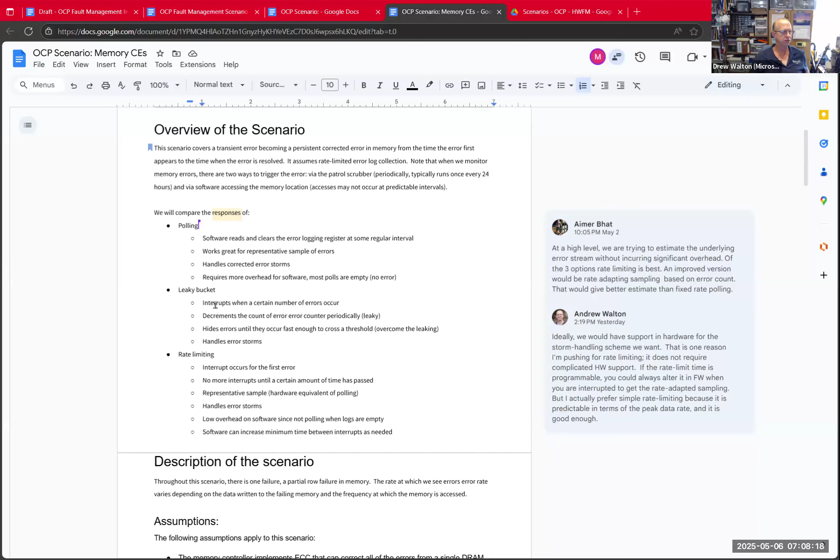Okay. And so then I have an overview of the scenario, and I really am pushing rate limiting, and you'll see why as I walk through it. And I've added things. I've added assumptions. I've added some goals of the analysis. And I'm also talking about some common misperceptions that I've seen. So I've added that since we last talked, like the ability to diagnose memory from a single corrected error.

No one serious imagines that, but some people say, you got the error, just look at the error and tell us what it means. And I'm arguing that we need to look at multiple corrected errors to figure out the scope of the damage or the scope of the fault. And then, we don't want to count errors. We don't need to capture every error.

And so, Roy, if you want to reinforce the need to capture every error, that would be awesome. Oh, yeah. Okay. I will add. Because you've got data, right, that you shared here. So if you're willing to share any part of that, it would be wonderful to have you all chime in as memory vendors.

But then I walk through the scenario, and I say, okay, there's a part of a row that fails, but it's not allocated to software. But it was all initialized to 0, and I just say, look, we don't see anything. There's no error, and then someone writes a 1 to one of the failed partial row that was stuck at 0. And now we get a single bit error, but it's corrected inside the DRAM. We see nothing except for the ECS mode registers.

And then software writes a second bit to the same cache line, and now it's in the same DRAM. And so we start seeing errors. And then we start reading the error infrequently. So we see few errors, then we read it frequently, and we handle the storm. And then we write another cache line in another place. So now we see error rows in multiple places, and now we can decide that it's a post-package repair.

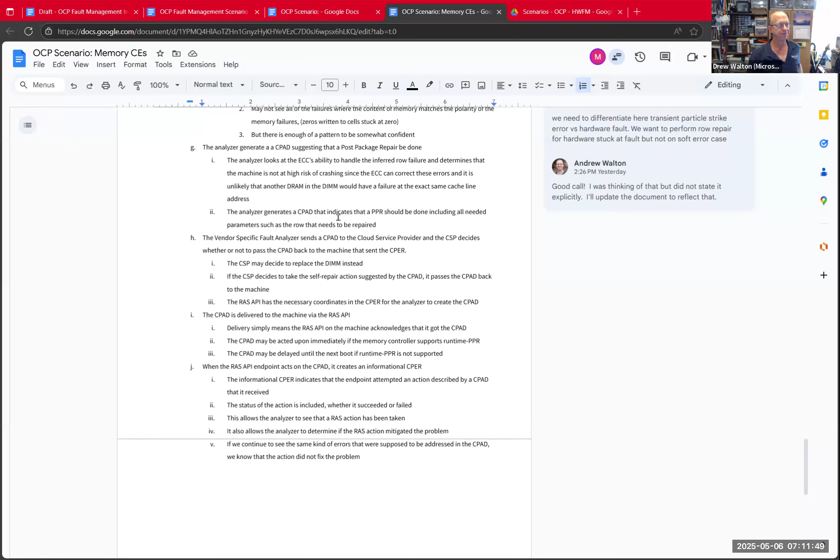I'm trying to do something that I think represents a mutual interest. Right? I'd like to see smarter memory analysis algorithms. And I think you all would too, right? You don't want people replacing memory for stuck-at faults, or assuming that because you had a small burst of radiation strikes, that DIMM is bad. So anyway, please take a look. I welcome your feedback, and I'll paste this link in too.

But my point for the moment, and I'd like to walk through it actually in great detail with you all, but my point for the moment is just that I'd like to pull these out of our FMFM doc. And so if you look at the FMFM doc, I'm now scrolling through that. Okay.

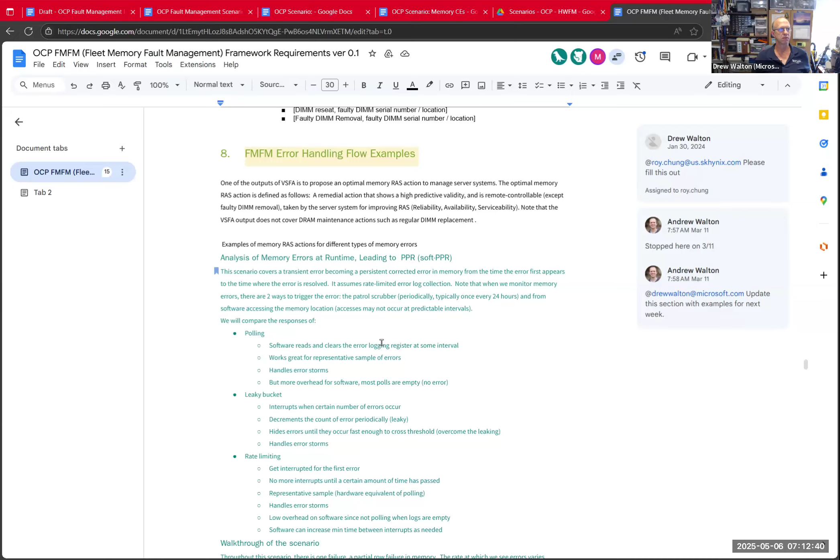We have the error flow examples, and I'm thinking maybe we could put a link to the example and say I've copied it in here. It's shorter, but now that I've pulled it out in a separate document, I can elaborate on it. What I'd like to do is take all of these examples, put them in the table of contents, and then fill out a sub-document for each, working with you to make sure we agree on how it ought to work. So does that make sense to you all? Is it okay if we pull these flows out and reference them somewhere else?

Yeah, I think that makes the most sense, Drew.

Okay, and I'm not trying to do anything controversial. I just want to get the spec out quickly so people can start implementing it and gathering the data we've requested. I don't want to hold it up for us walking through the flow. So what we'll do is walk through those flows in separate documents, and as we agree on them, we'll mark it as no longer a work in progress, that it's been reviewed. It would help if you all want to put your names on it as authors, to say industry experts, Vilas, Yogesh, and others at Intel and AMD put their name on it, saying all the experts got together and here's what you need to know about memory errors for this scenario. So if that's okay, I'll pull that out of this doc and put a link to the other doc, the table of contents, which will have links to the actual scenario documents.

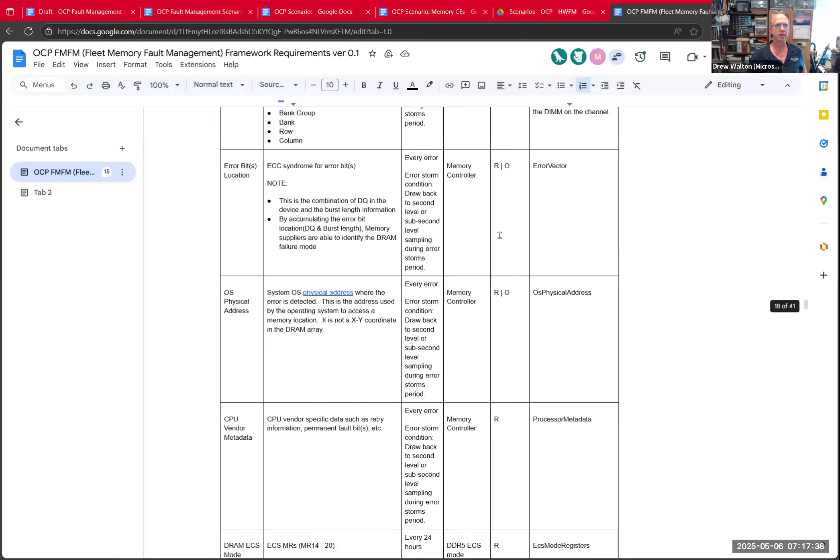So then we can go back to our regularly scheduled review of the doc. I think we're pretty far along. This is looking pretty good. Let's go back to those grids once we think about them a little more. Okay.

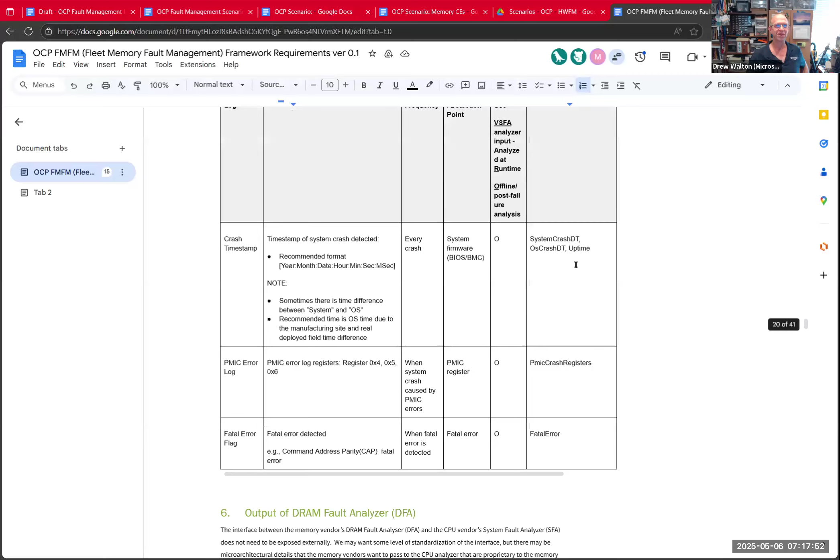So I'm just going to the first comment. I think one of our recent reviews, well, you had an action item, Evan. So why don't we take a quick look at it? Yeah, Drew, I wrote something in here quick.

The point I'm trying to get across is that the reason we put the DFA log output separate is to have that as an option. The thing I want to avoid is putting it necessarily behind the system fault analyzer. I don't want to have that as a gate.

I know we need some input from the system fault analyzer to do the DRAM decode anyway. But I'm trying to assess the error in light of the ECC. On one chip, the ECC may handle it, on another chip, it may not. But I see your point that you want to expose what you're thinking.

Yeah, and that's at least what I want as an option. It's up to whatever policy the server operator has for how they want to weigh that versus the SFA output. Maybe they just take the SFA output and that's okay. But in cases like we get asked a lot for what our opinion is, I'd just like to be able to directly have that option.

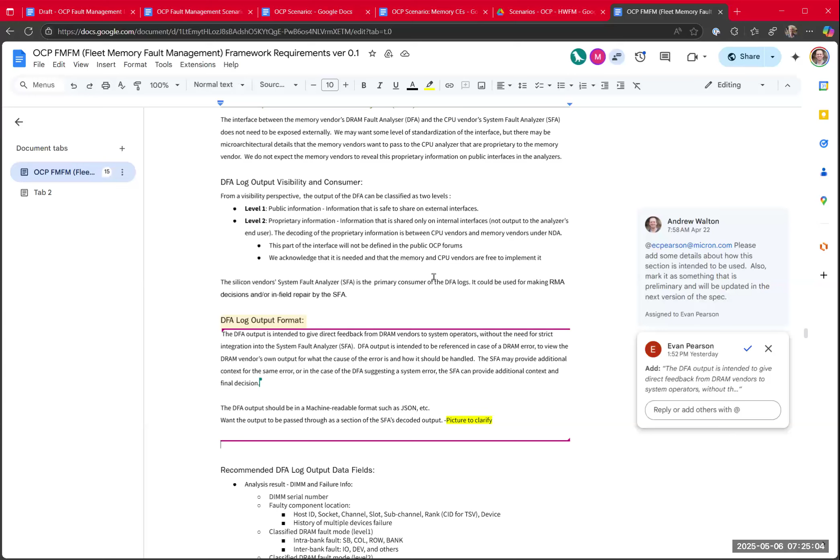And so they may get limited decoded output. Well, let's just talk routing, right? Not the implementation, routing wise. Yeah, I mean, okay, it's probably just easier if I whip something out and show you what I'm thinking.

So, okay, so you get a CPER in, and you have the SFA, and I'm not going to bother doing this the right way because I'm trying to go fast. I'll make a nicer drawing later. Okay, and then you have the DFA inside it, right?

Yeah. Okay, the CPER, it goes ultimately to the DFA, and I'm glossing over the decoding, but the SFA decodes it and formats it in a way the DFA can get it. Let's just assume that's the case. Okay, there are two outputs of the DFA.

There's the decode, or there's JSON. There's some sort of JSON description, and there might be a CPAD. Okay, and so those come out. Now the SFA will also have some JSON.

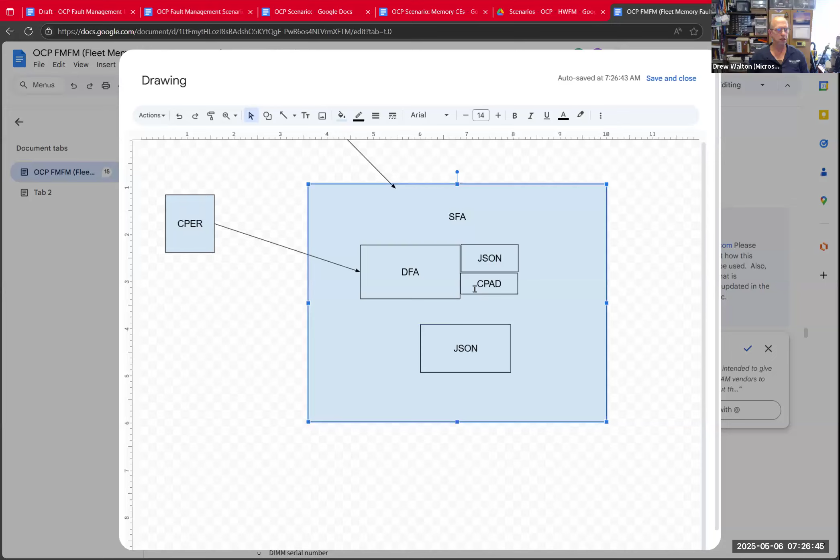I'm making it bigger because I'm assuming it may have more, and it also has a CPAD. And then the output of the SFA would be a CPAD and a JSON. Actually, I don't know if this is a CPAD or if this is a CPAD driver. There's some sort of communication, a CPAD-like suggestion.

Because the problem is that you can't really write a CPAD from the DFA, because if you were to say do a post package repair, the SFA has to figure out which registers to write and how to format the data in a way that it needs for its chip. So I think there's some sort of work here that goes from a CPAD suggestion from the DFA to the actual CPAD that works on the memory controller.

Are you all following me so far? Yeah, no, I understand the hierarchy, Drew. What I was trying to get at really is which IDs. We don't have any IDs described yet.

Well, but I guess from the CPER world, which record ID, header dot record ID, header dot creator ID, platform ID—all of that is particular to the memory controller, not the DIMM. So that's all just part of the CPAD. We're really talking about decoded output here.

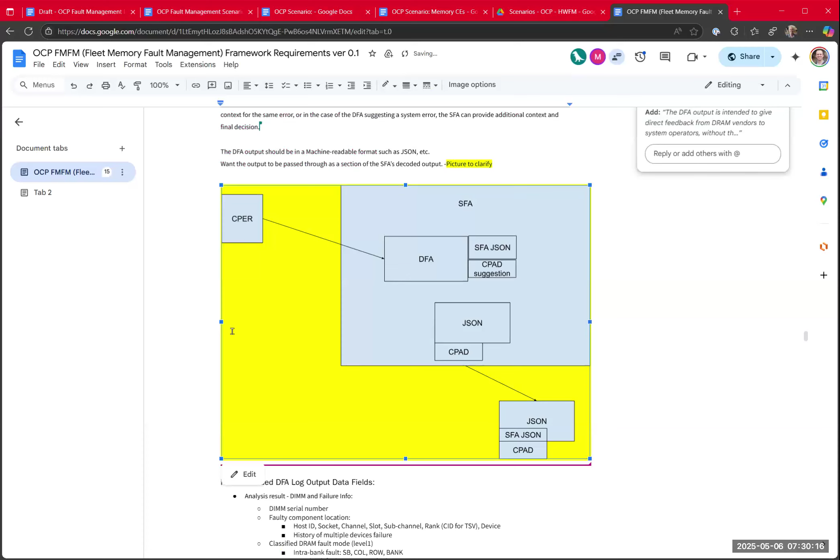So let's do this, Drew. Let's table this ID discussion for now. I'll work on this some too and bring it for next time and put it for review. Okay. Let's try to get through the rest of this document today. I think we are very close.

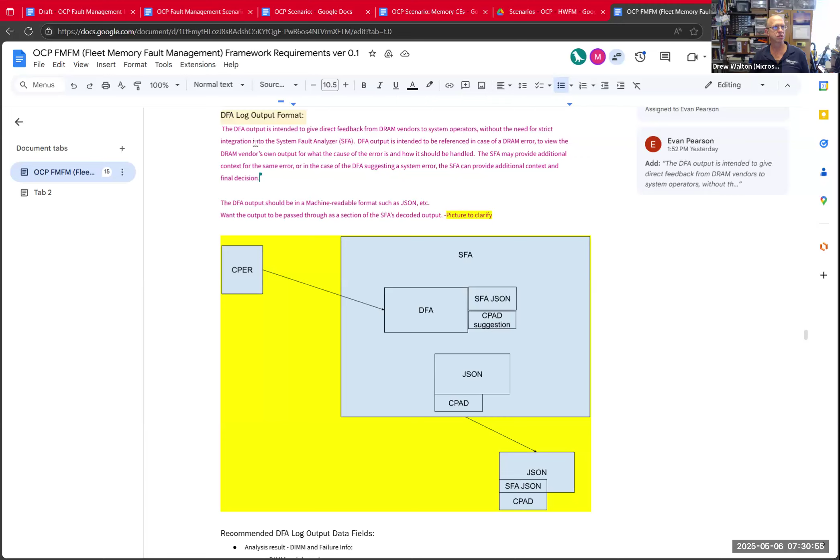Sure. No, but I guess my point is that Evan is saying that, hey, the memory folks would like to be able to include some output that we can look at that describes what the memory vendor thinks about a memory problem. And so I'm proposing. I think I would call it either debug hint or, you know, action hint from DFA to SFA, and SFA creates the final CPAD. Yeah.

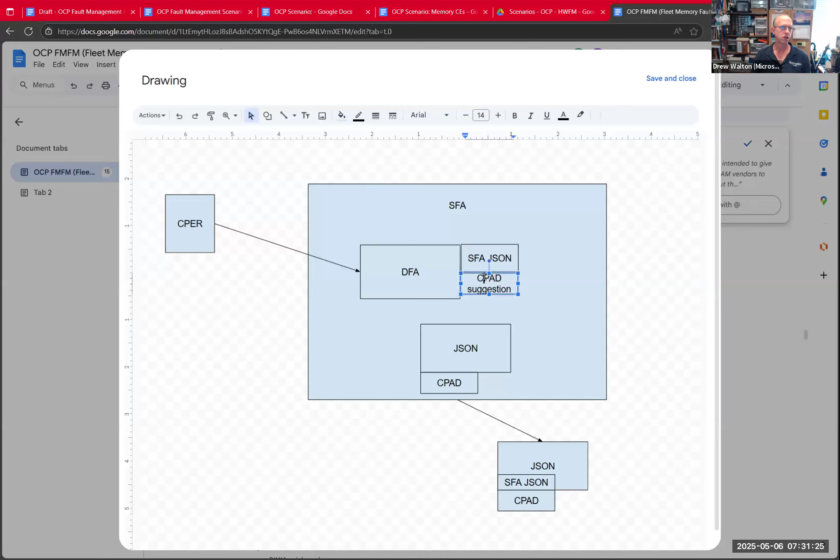Okay. So I'll call it action suggestion. How about that? Is that okay? It's fine, but if you want to say a few words, you can also say hint. Yeah, either is fine. Okay. I'll work on it.

I mean, we'll describe what that is, but the thing that Evan was talking about is this JSON that they want a place to put something out that says, here's what we thought, that we can see as end users. So are you okay with them giving you some JSON from their interpretation of the memory problem that you just embed in your decoded output? Embed as in without making any changes to it. Yeah, you want it to be passed through.

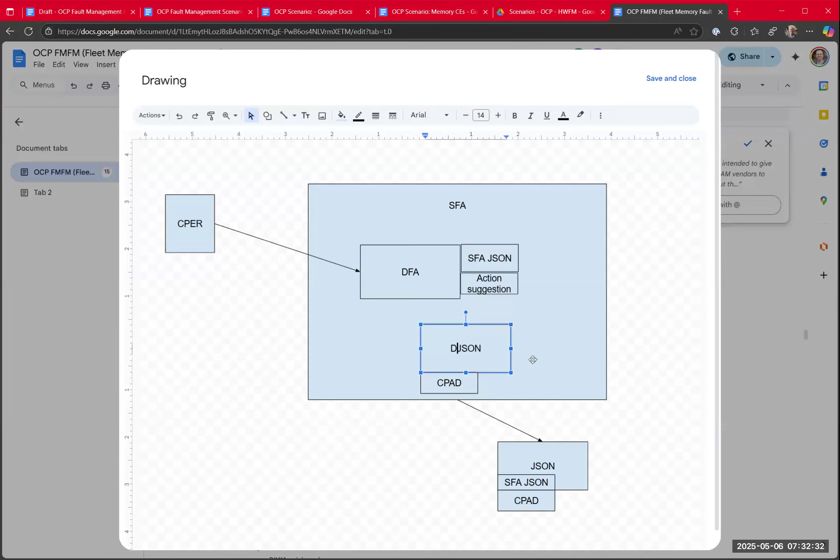Yeah, just pass through. Just SFA pass through as it is, and on top of that, another JSON which is DFA, or actually SFA, DFA pass through. So your naming in the bottom box is actually wrong. It seems like DFA is a smaller JSON, but it seems like your SFA JSON will be the big action one, and the... oh gosh, you're right.

Hey, backwards. DFA will be just a small pass-through hint thing, yes, for your analytics at the infrastructure level, but the SFA JSON is the one that would be decoded and would be basically driving the CPAD recommendation for the infrastructure and memory. Then you can take a look at it and say Yogesh doesn't know anything, I'm just going to listen to Evan, right?

Well, but I mean that's not the intent. It's just that, hey, if it's a weird thing with a Micron DIMM, then I can capture all of these DFA JSONs and send them to Micron or talk to Micron about it and go, hey, what's going on? And we can have a conversation about the Micron part that we have questions about. So it kind of makes sense to me that the memory vendors want to be able to pass through some information about what they think in the decoded data.

Yeah, and that'll certainly help us when we get questions, Drew, just to be 100% certain that that's what our analyzer said. Yeah, I think... okay. Vilas is not here, and neither is Dean. I think we need to also discuss this with others, but I'm in principle not against it. I don't want to block any debug information at any level, but there may be some nuance there in how different silicon vendors may think about how to handle it.

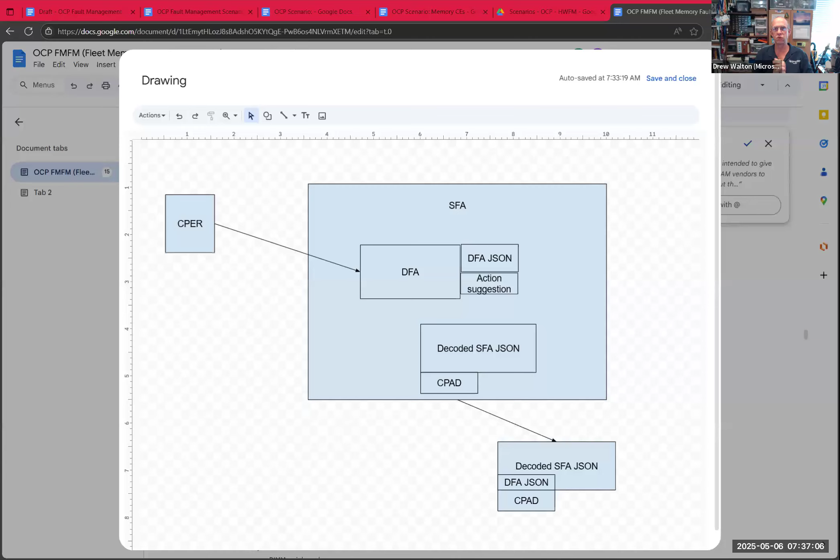And with us, with hyperscalers, we tend to want to be partners in helping you get the best possible products out. It's because we want good products from you, and we're willing to share data. And because of that partnership, we hope to get more detailed data. Yeah. Sorry, Drew, didn't mean to interrupt you. Charlie might want to chime in. Charlie, what do you think? You have a lot of experience.

Good question. I tend to agree with Drew. Cisco would like to partner with our vendors to improve product, right? So it's just a question of how we share as much information as possible, and not have people who think they know RAS jump to conclusions. So whatever we engineer here has to be geared towards sharing the right information and not generating misinformation.

Yeah, I'm along with you there, Charlie. And I can add that I think the hardest part about a lot of things in RAS is deciding on the right heuristics. And getting those heuristics right usually means you need to observe tons of data. And even if the RAS API gets us the observability as a first step and the heuristics come after that, that makes sense to me. So this is in line with that.

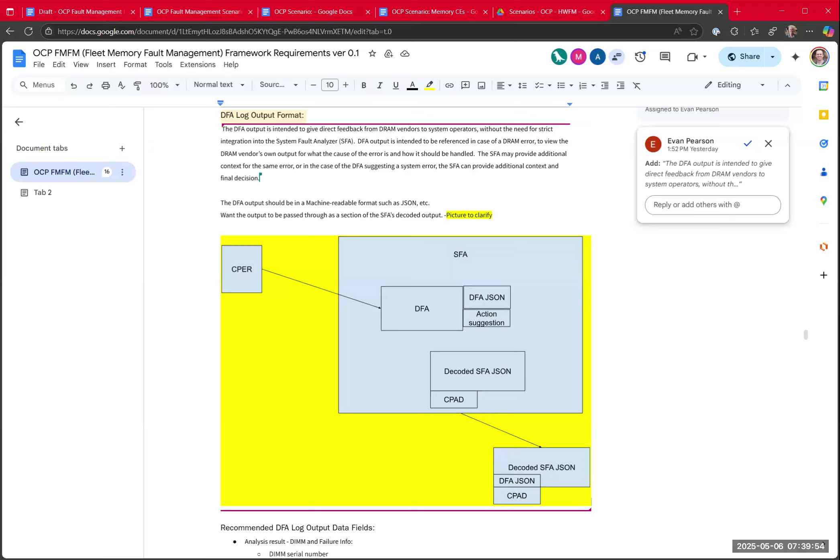Yeah. If I may add something here, some of these decisions are not just hardware dependent, not just software dependent. We have to think through the whole system as a single entity to figure these thresholds out. Yeah, it's a system level decision, right? Yes, right. And that's the kind of vision we bring from a RAS point of view, a system view.

Well, I think that's valid, but we need to do it in light of a true understanding of the problem. Even at HP, I would do the same thing that Charlie did. I'd talk to a group that I hadn't worked with before and see what they were doing and be horrified, because they didn't understand memory errors very well. So I think we just want to spread that knowledge, but I agree that it is a system level thing.

And that's why, in the analyzer framework, we need things from the BMC as well, because my classic example is you might have a flaky PCIe link. The CPU may blame a GPU, the GPU may blame a CPU, and the BMC may say, oh yeah, I had a bunch of clock glitches. I've got a failing clock circuit on this PCIe link. I'm the problem. And so we do have to look at the system level because voltages, clocks, all sorts of main board problems can contribute to memory errors as well. Cool.

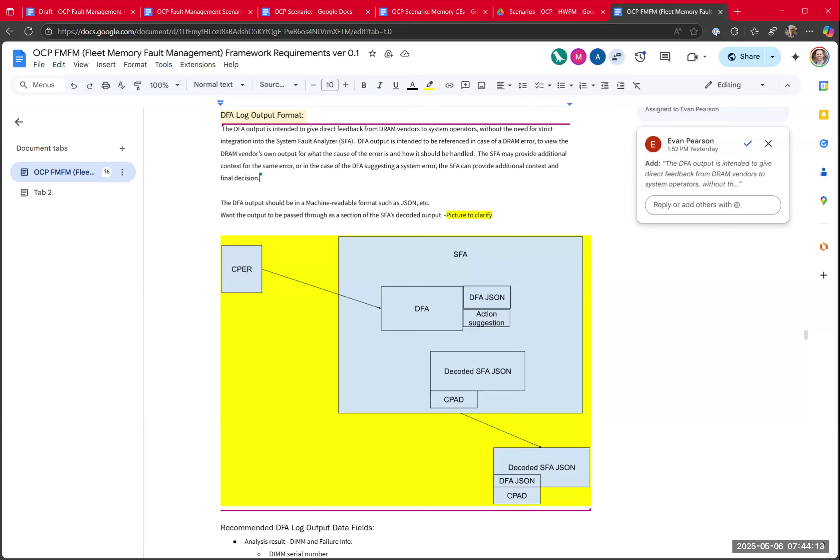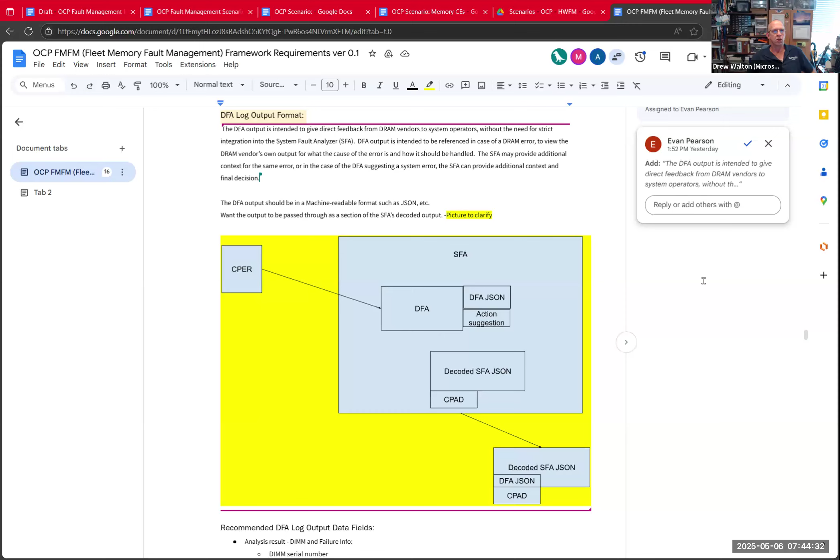And the gist of it is the analyzer should have two things. One, some details about what's going on. Those details will vary depending on their relationship with the end user, and then a CPAD, which we can use to drive automation in the data center. Cool. Okay, Evan, I'm going to accept your changes, and then I'll clean up later. Yeah, sounds great. Thanks, Drew.

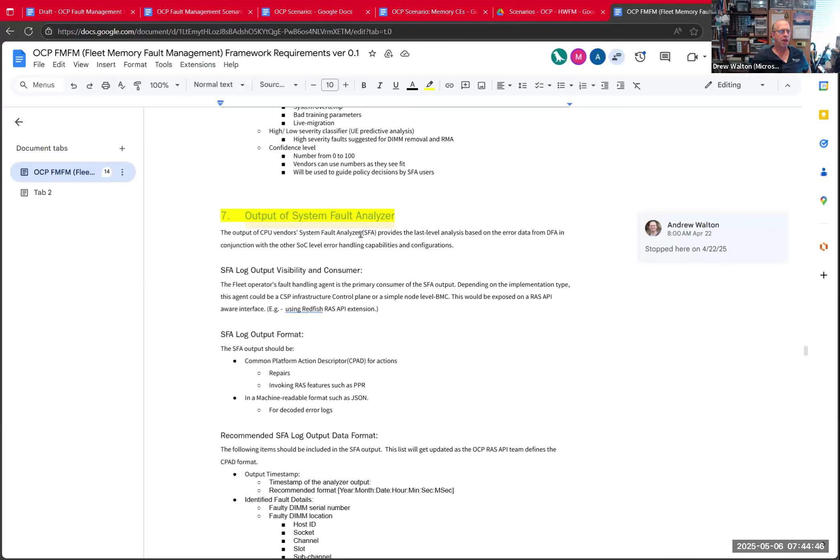Okay. And so here's where we stopped last time. I'm going to clear that and get rid of the highlight. And a long time ago, we asked Roy to fill out some scenarios. And Anil, earlier I proposed that we pull these scenarios out and link to the document just as you and I have been working out. So we're not getting rid of them. And by the way, I fleshed out a lot more detail in the corrected error scenario. But my thinking is we're just going to do what you and I talked about, right? We'll have a list of scenarios, we have a template, and then we'll have...

Drew, are you sharing? Yeah, I'm flipping between. I can see it, Charlie. Oh, that's interesting. So in Zoom, how do I? Okay, never mind. I'm just seeing you, Drew, and not what you're sharing. Oh, I'm sorry. That's not what you want to see. Never mind. You should not be sorry, Drew. It's always nice to see you in the morning. Yeah.

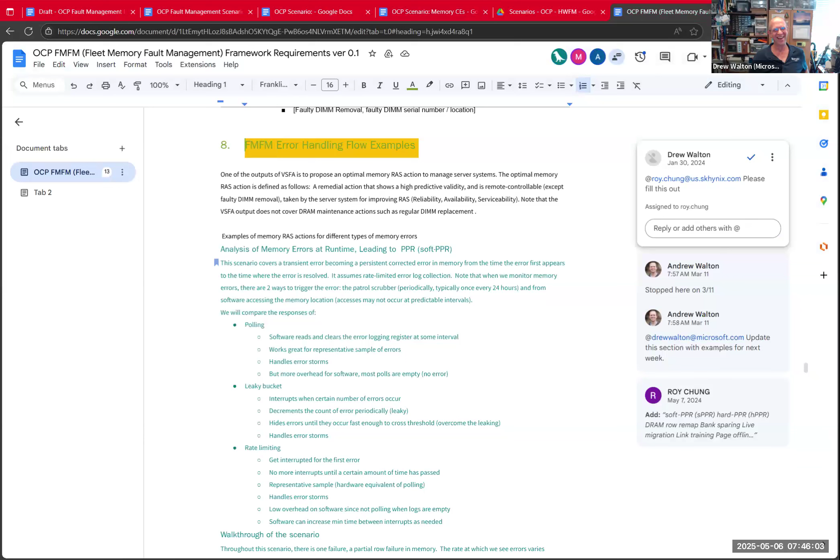So anyway, Anil, I talked to the team earlier about pulling this section out and then referencing it in a sub-document, and that didn't seem controversial. So my intent is I'll pull this out and make sure the table of contents document lists all these scenarios. And then we can spin off those documents and walk through and review them separately once we've got the spec out.

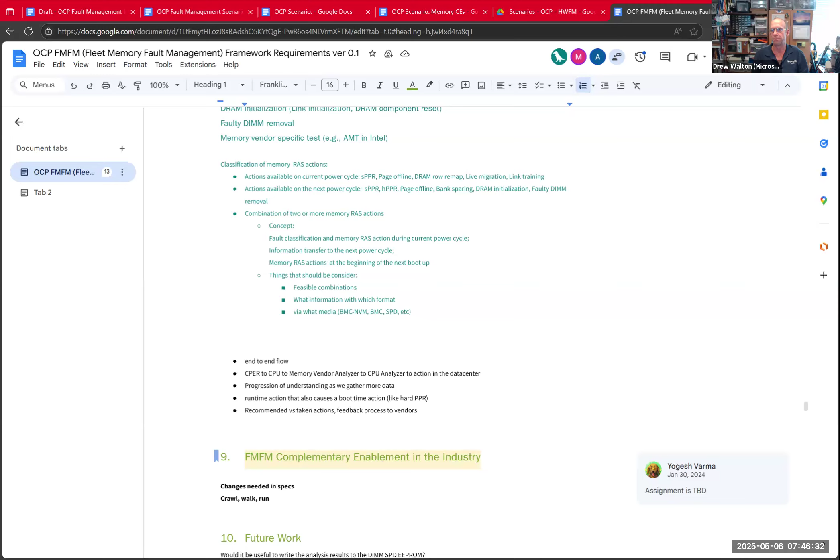So then I think we're pretty much there; we need to fill out these empty sections. And I think one of the things that we want to do is walk through scenarios. And I'm imagining we delete this section of the document or clean it up. But this is just what's next. So I don't know what else we need to do. I mean, I guess we need to handle the orphan content and clean things up. But we're really close.

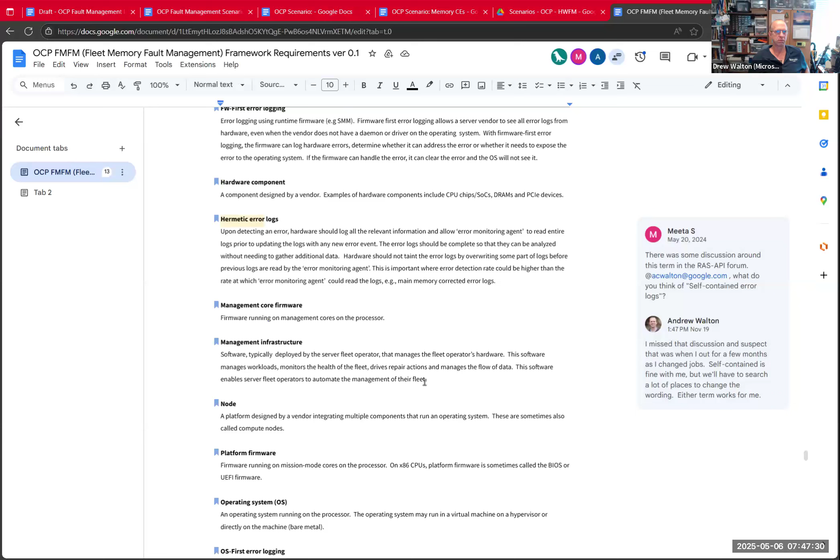So I will. Oh, Anil, are you gonna be able to do this, or do you want me to come clean up these addresses? You're on mute, by the way. Oh, sorry. I didn't know that I had to fill this up. Sorry. Let me check. Let me do it. Okay, no biggie. I mean, I'm not being flippant. I'm happy to do it, or you can do it, whatever.

Yeah, and then we need to address that. Did we use OS physical address somewhere in this document? Yeah, we did. And it's important to define that, because if you look at JEDEC, their physical address is where on the silicon it is physically. But if you say OS physical address, then that means not an OS virtual address. So that's why I think it's important to define what the OS physical address is.

Okay. Let me take it, because from an OS point of view, the physical address is, from a hardware point of view, what we call system address. Right? I think it's the cache line address. Look at what Linux calls it, it's OS physical. Correct. So the context we want to clarify here is from a Linux or OS point of view, the address we call physical address maps at the system level, at the hardware level, to a system address.

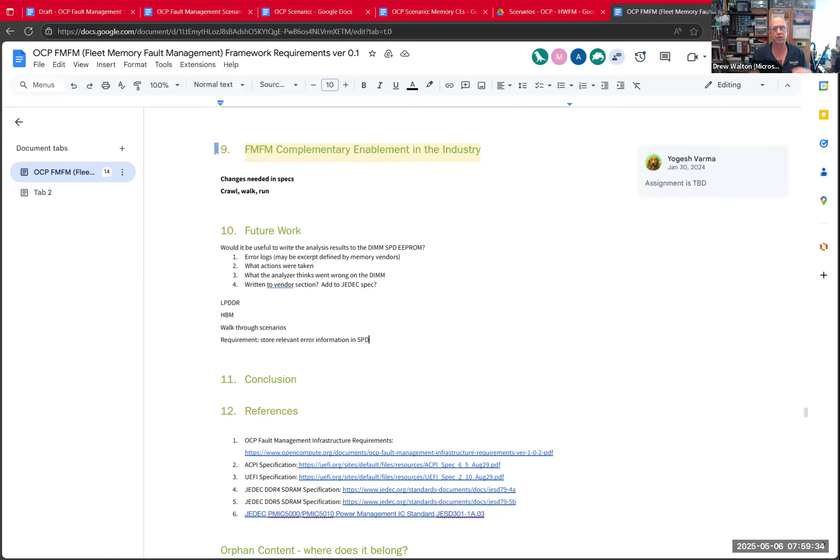Yeah. And so I think we have this requirement that Anil mentioned, that we want to store relevant information, and then we'll figure that out, and maybe we can squeeze some of it into DDR4 in some space, and 5, and then for 6 we say, hey, we want to do something more. We don't know what we want, so it's kind of hard to ask for what we want. Right. That's why I was requesting the DIMM vendors to give us some hints on where we want to go. But anyway, good discussion today.

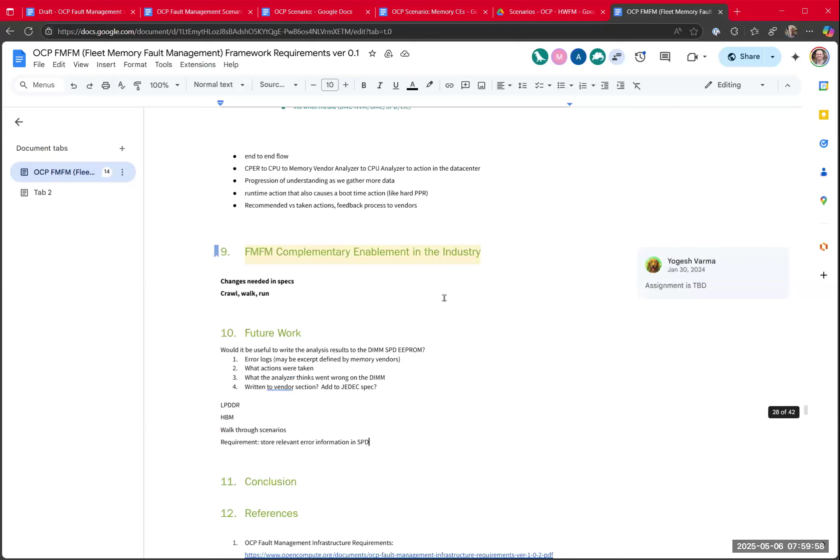We are almost at the end. My request to everyone is, if there is not a list of contributors in the front, I'll add the table. Please add your names, and let's wrap this up. Almost on top of the hour now. So okay, I guess I'll accept your change, Anil.

And one request, Anil, did Thanos leave Meta? That's why the deletion, or yeah. Sometimes we just change it like we did Carlos's, right? He just changes the company name and also mentions formerly. Oh yeah, that's a good point. So rather than deleting it, because for some time he was active in this group, I remember that. Yeah. So we should recognize his work.

Okay, so I think for next meeting, our goal should be to go through the document, and we need to figure out, well, I can make a holding document for things we want to pull out temporarily and then put back in later, like the SPD data, and then just clean up the final sections.